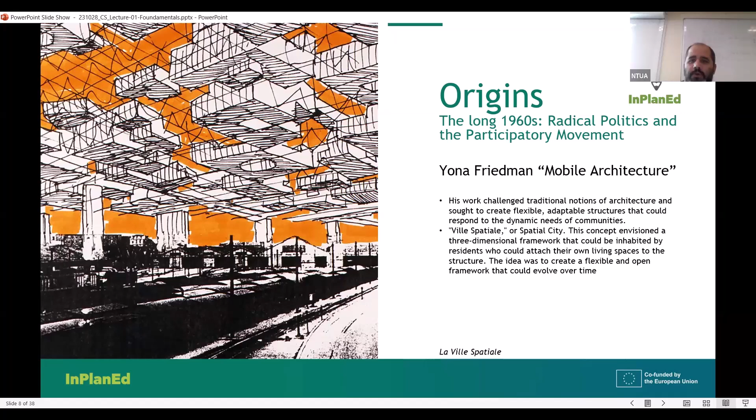He created this vision of Ville Spatiale, or Spatial City. This concept envisioned a three-dimensional framework that could be inhabited by residents who could attach their own living spaces to the structure. The idea was to create a flexible and open framework that could evolve over time, as citizens adapt their needs and transform it. Keep this image in mind, because we're going to see it replicated a lot in the last decades.

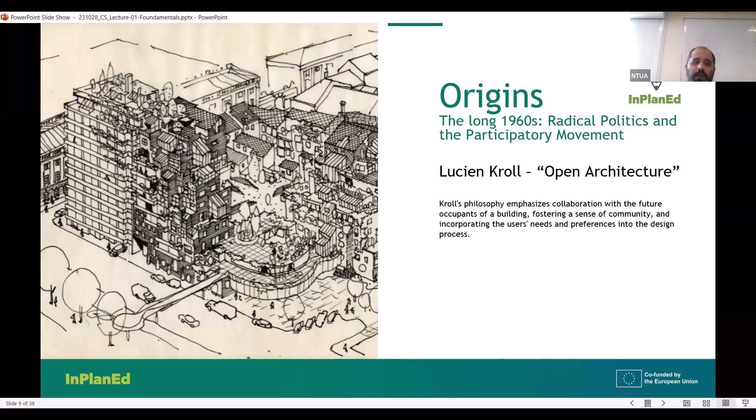The work of Yona Friedman is linked with that of Lucien Kroll, who created the concept of open architecture. There are many similarities with mobile architecture, as you saw in the previous slide. Kroll's philosophy emphasized collaboration with the occupants of the building, fostering a sense of community and incorporating the user's needs and preferences into the design process from scratch. We have several examples we'll see later, but keep in mind that all these concepts are linked under the notion of adaptability and flexibility.

Similarly, the work of Christopher Alexander on pattern language is important for those with a background in urban design. Christopher Alexander was an academic and practitioner who created the concept of organic development, based on the understanding that the mechanisms of city evolution and history are linked, and the need for bottom-up approaches and participation that lead to flexible development. The issue of flexibility emerges again and again — as mobile architecture, as open architecture, and here in the concept of pattern — but all of these are linked.

We will see all this in some cases we think are very important in this concept. The first one is a project in Lima, 1968, in Peru, in the area of Pamplona, where there were significant issues of housing the local population, with many informal settlements and people needing shelter.

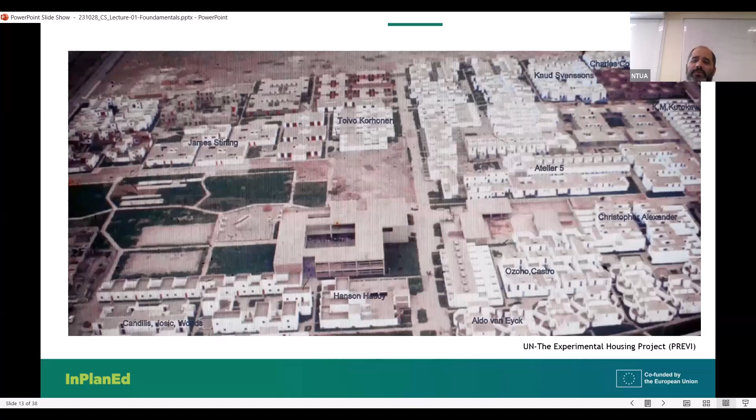The UN funded what was called the Experimental Housing Project, or PREVI. This was a very pioneering program at the time, where a variety of architects and urban designers were invited — Aldo Van Eyck, Christopher Alexander, James Stirling, and many others — who worked with local communities to create housing projects with different types to accommodate different needs.

So this is the result of this process. In reality, it was the creation of a baseline framework that residents could adapt, evolve, and change. It has a lot of similarities with other participatory projects, where you create a baseline where the user can put his or her own ideas and needs into the housing unit. So we have this idea of a row of houses that users could adapt, adding more units or rooms to facilitate their needs.

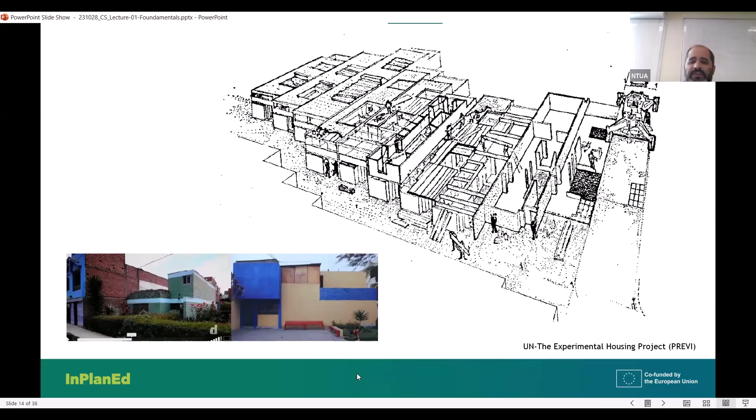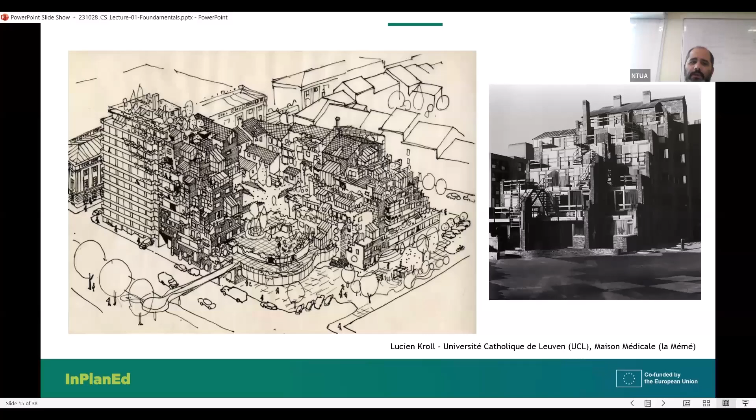The next project is one of Lucien Kroll: La Mémé, the Maison Médicale of the Université Catholique de Leuven, UCL — not the one in London, but Louvain. Kroll created a master plan for the area that combined the student residencies and the whole medical department, working closely with the user space — teachers, lecturers, and particularly students. The result was a building that, in abstraction, resembles apartment buildings common in Greece or other southern European cities.

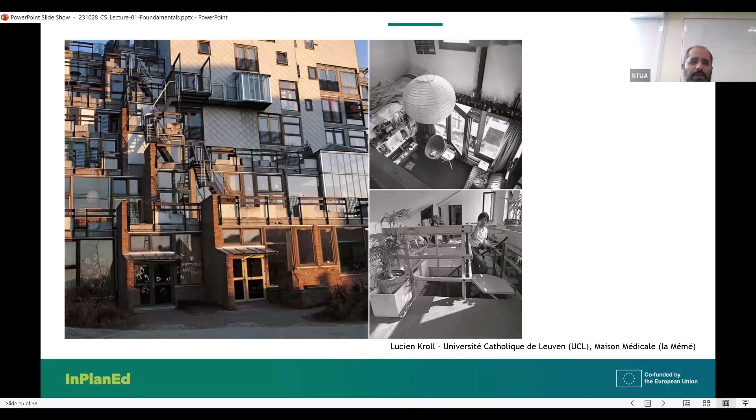So it's very uncommon for Northern Europe, but it's actually a result of this process of participation. Users added all these elements and functions to the building's facade to facilitate their needs — a lot of new additions, a lot of balconies, as you can see. So the whole structure was a process of redeveloping a building with the users from scratch.

The next project is Byker Wall in the UK. It is, in one sense, a milestone project for the whole discussion on participatory planning and participatory urban development. It's the work of the British planner Ralph Erskine.

So what Erskine tried to do was involve the people in the whole process. So the area was demolished and it was redesigned from scratch.

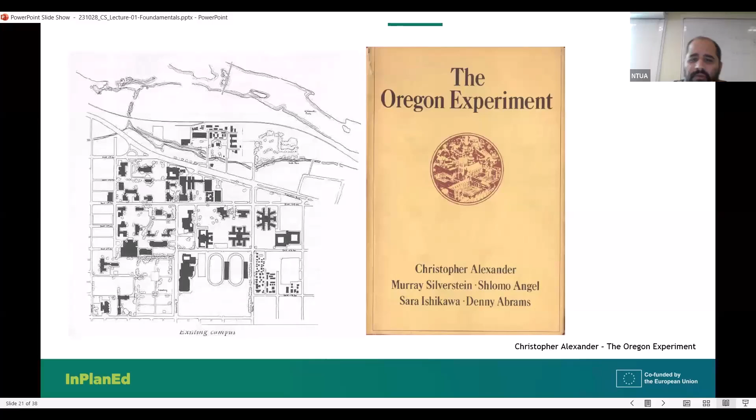The next project is one of Christopher Alexander. It's again a project in the US, in Oregon. It's an experiment and a project that had to do with the University of Oregon. Alexander, with his team, was commissioned to redesign the whole campus of the University of Oregon.

And he wanted to implement this concept of pattern language that we presented earlier on. So what this meant was that Alexander created a framework where the users would adapt and change it, a framework that gave stakeholders of the university the opportunity to adapt the design based on the needs of the university.

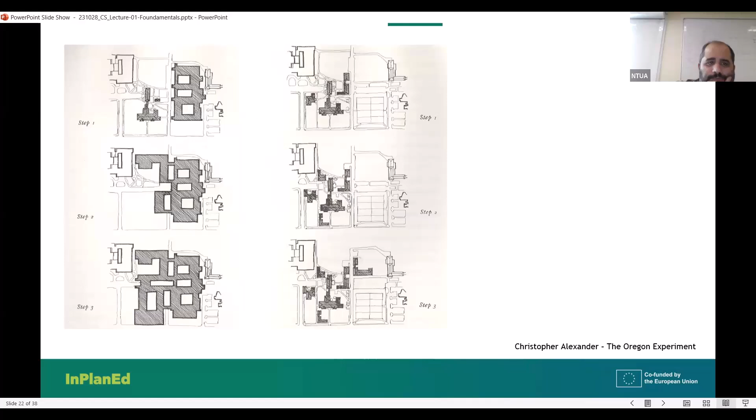This diagram presents this idea, and I think this is the most interesting one, showing this kind of densification. In a sense, this is something we see in all the projects: participatory methodologies do not actually create an end product, a final design that people need to move into. Instead, they create a kind of framework that can evolve.

People can change it, or authorities can change it, based on the needs of the user. So again, we see this in urban planning master plans, where in this figure ground we can see how this is going to evolve in the following years. It's a kind of phasing, in contemporary terms, but something that was not very common 40 years ago.

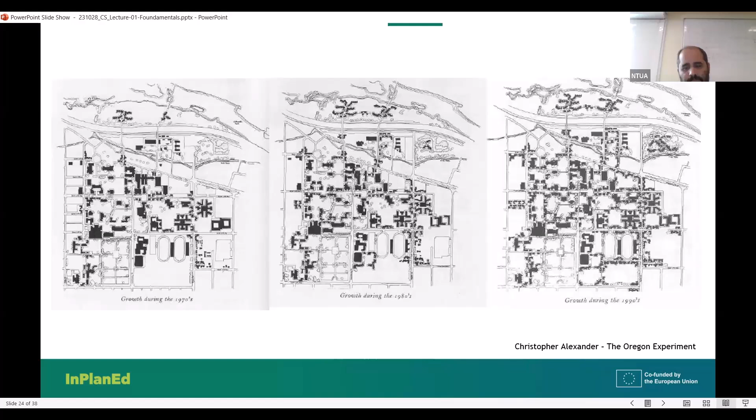From this single project, we move now to a more universal project, in a sense that it represents a whole country: Portugal. After the democratic transition in the 70s, Portugal initiated a project called SAAL, in 1974 and 1976.

SAAL was a housing project that aimed to house over 50,000 Portuguese families in many cities across the country. It was a very interesting case because, first of all, it was implemented particularly in the first year, in the first phase of development.

It was linked a lot with the social movements of the time. There was a very strong housing movement in Portugal that emerged after the fall of the dictatorship in the 70s. And the project also involved many participatory techniques, from assemblies to co-design processes, even involvement, as we can see in these pictures, of locals in the construction of the projects.

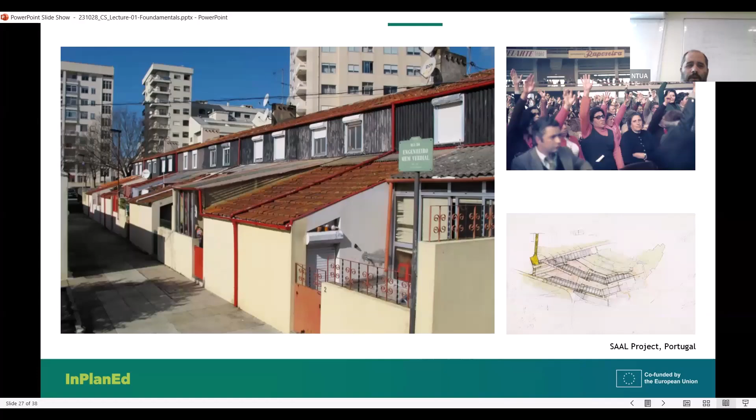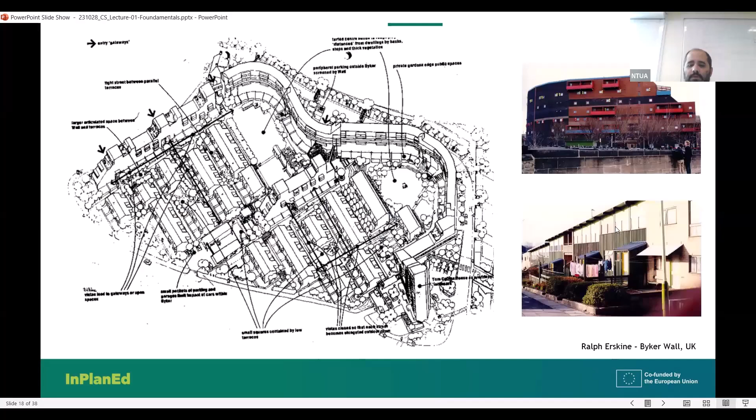The end product, again, is similar, and this is very interesting. The final form is adapted by the users. We see a lot of extensions, a lot of similarities in this image, particularly with the previous one we saw on Byker. You can see this kind of work with courtyards, all this notion of design that we saw in the previous case.

So, until now, we were describing some historic cases that focused a lot on the 60s and 70s. So at the time, I think we're okay now.

Now we're going to discuss a bit about the more contemporary period, in the last decade or 15 years, where we have a new kind of participatory turn. So how did the previous participatory turn end?

Until all these projects that we discussed in the 70s and 80s, in the 90s we had a turn towards more market-oriented design. As you can imagine, this affected the whole discussion of community engagement. The projects that emerged in the 90s and 2000s did not have the same principles or the same vision as the ones we discussed before.

What was also important is that participatory processes were already introduced and institutionalized in several cases. But this also created a problem: when a notion is institutionalized and becomes part of a governance project, many times it loses its meaning, it's not implemented correctly, and this created many problems.

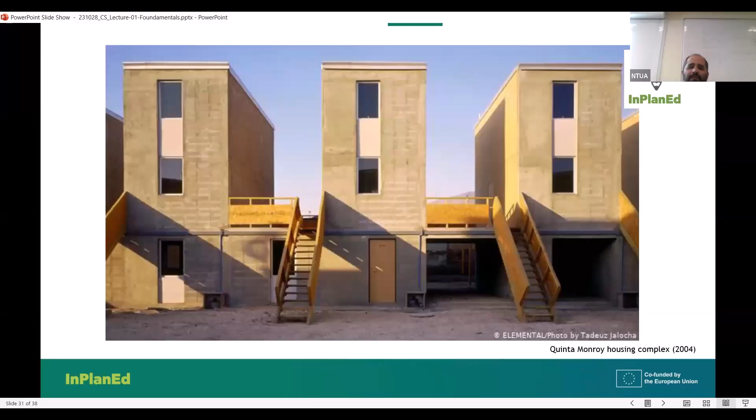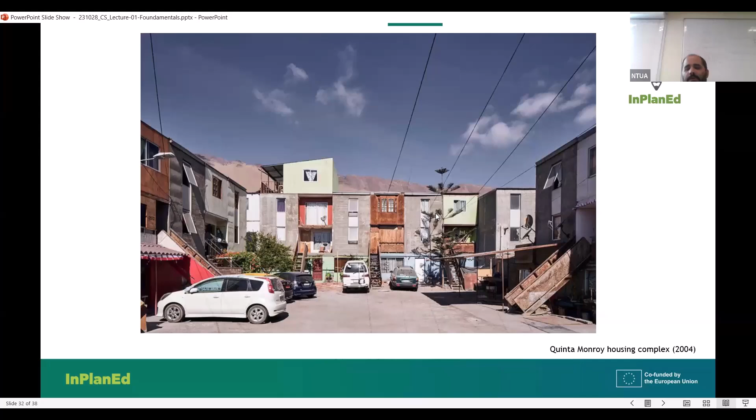This is his most famous project, again from 2004. Remember all these images we saw earlier and how similar they are—this is the Quinta Monroy housing project. It's a project where the architect and planner create a basic framework, and then the users change and adapt it based on their needs. You can see how these voids are filled based on the needs of the users and residents.

We have a huge discussion, particularly in the last years, around housing needs and housing problems. The housing problem is something that affects us a lot here in Greece, but during the tourism boom of the last decade, particularly in urban centers—the notion of over-tourism—we have a huge discussion about lack of housing for local residents and how this could be addressed.

This is the project La Borda from Barcelona, a cooperative housing project, and we can see again how participation is introduced. This is a design workshop with residents of the project, and how this reflects the final design of the project. So we see now a more contemporary approach, of course.

Again, this is the retrofit work of Lacaton Vassal in France, a building that is a former social housing project being retrofitted into a new design based again on participatory disciplines and processes.

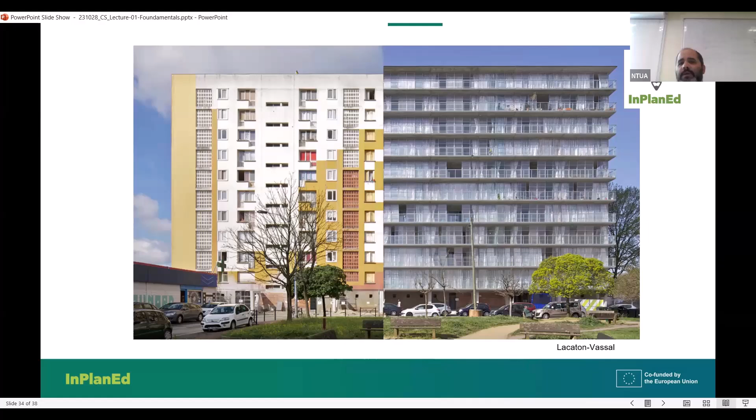We see that we have a new kind of view of participation, but the core idea remains the same: that users have a common framework that is adapted based on their needs. Again, in terms of mobility, the whole process of participation is reflected in the Superilles project in Barcelona.

This is the Superblock project, for those that don't know the term, and how this new notion of tactical urbanism—the use of cheap, easy to implement materials—is implemented in this case.

The notion of tactical urbanism is an interesting one because it has to do with planning, urban design, and a huge focus on public space. So it's not so much a discussion about buildings as we saw in the previous projects.

It's an idea that you can create places, and thus comes this notion of placemaking without grand designs, without expensive gestures. With simple materials and structures, you can have basic forms that people can use, which can change the perception of the city and the design.

So these are some initial thoughts. I hope you found it interesting, and we're ready for discussion. Thank you.